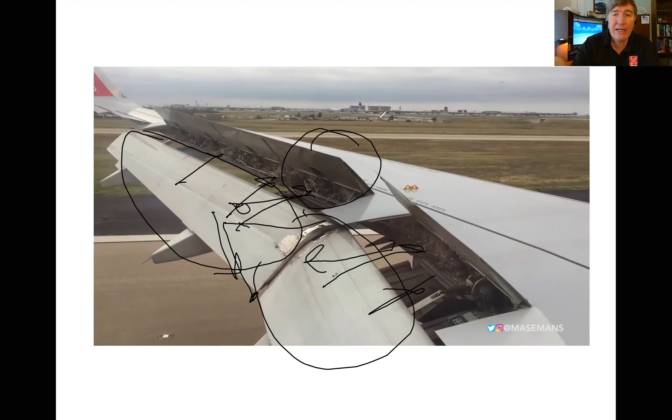But the reason I like this picture so much is because inside you can see, let me switch to a different color, the hoses and pipes. So inside here, there are pipes and hoses running all over the place. Those are hydraulic lines. Those are the things that make the flaps come up or go down. They're all based on hydraulics.

So what we are going to do for the next little while is learn about hydraulics and how they work. And there's also something called pneumatics, which is very similar to hydraulics. So if you've learned the one, you've basically also learned the other.

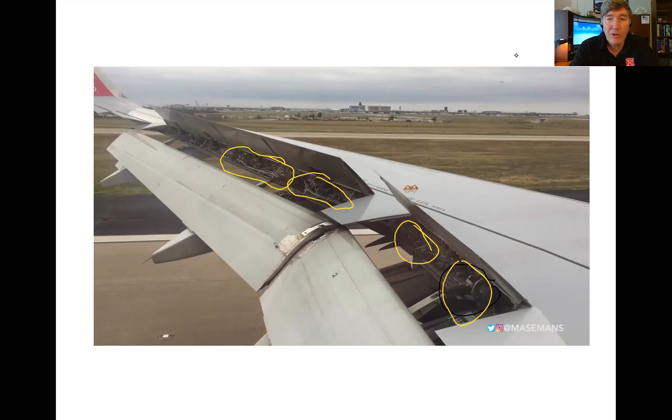So before I go on, let me just ask a question. I'm sure there's somebody here who can tell. What is the difference between hydraulics and pneumatics? How are they different? And also, how are they similar? I'm willing to bet there's somebody here that can answer that question. Come on, don't make me lose my bet. What are hydraulics? What are pneumatics? How are they similar? How are they different?

All right, so Marshall is saying that hydraulics use water and pneumatics use pressurized air. Okay, very good. So let me just modify the wording slightly: hydraulics use liquid. Now, water certainly could work, they could use water if they wanted to. But quite often they don't use water, and there's actually a very good reason why they don't.

Can anybody think of a reason why you would not want to use water in your hydraulic system? Would it evaporate if it gets too hot? Well, it's entirely enclosed, so that even if it did turn to water vapor, it couldn't escape anymore.

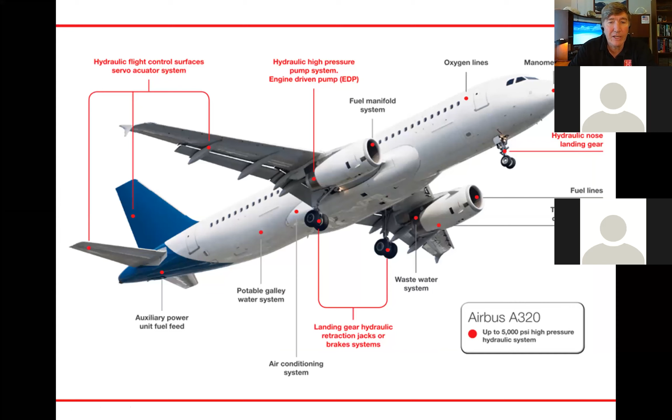All right, just more things on airplanes that use hydraulics. I got a lot of pictures, we could talk forever. You see how the hydraulic lines run through the airplane here. A lot of people are surprised when they realize how much the airplanes rely on hydraulics. Okay, so here is a great example of how hydraulics work. Let's say that you have a piston.

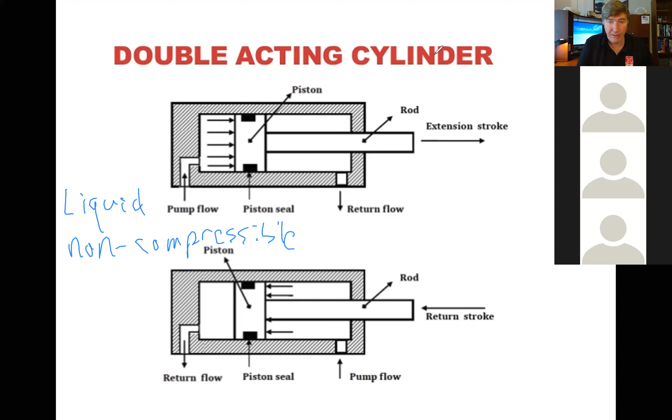If I have a balloon filled with air, if I can wrap my fingers totally around the balloon and I squeeze it, I can make that balloon smaller. It's going to want to sneak out between my fingers, so I'll have to make sure that doesn't happen. But I can take 1 gallon of air, and if I do it right, I can press it down and change that 1 gallon of air into a half a gallon of air. Now that half a gallon of air is going to have a lot higher pressure than the 1 gallon did, but I can compress it.

Whereas if I tried that with liquid, if I take a gallon of liquid and squeeze it, I can't change the volume. One gallon of liquid is going to be one gallon of liquid, no matter how much pressure I put on it—it does not change volume, whereas air does. That turns out to be very, very important when you're using pneumatics.

So let's suppose that I want to move the piston out. Whoops, sorry, I need to remember to turn on annotation before I touch my screen. Let's say I want to move the piston out, but only a little bit, maybe just 1 inch.

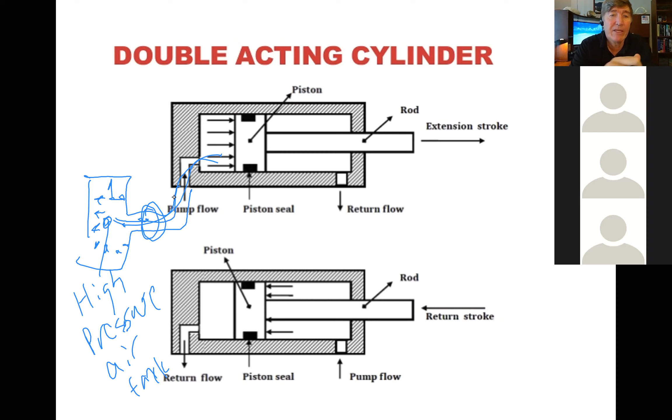Oops, I pushed the wrong thing there. So when you open up the valve, all of the air comes rushing in pretty much instantaneously, and this piston goes from being fully closed to fully open in no time flat. This piston comes shooting out with so much force that you could easily kill somebody using it if you're not careful.

Have any of you seen the movie No Country for Old Men? There's the bad guy in that movie—he kills people by walking around with a high pressure tank of either air or nitrogen and a piston like this, connected together. He holds the piston up next to somebody's head, opens up the valve, and that thing comes out like a bullet, and he kills people that way.

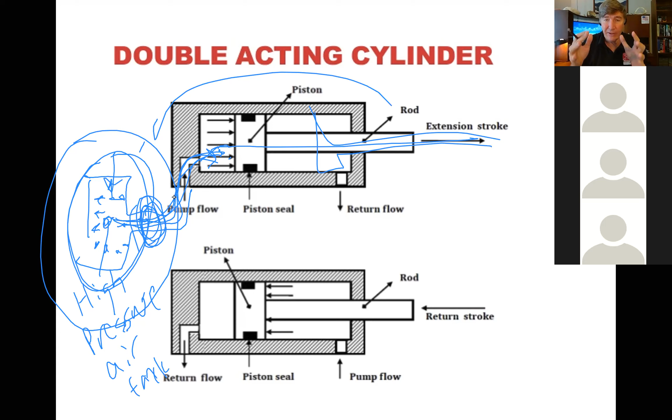If you tried to do that with hydraulics, you would not be able to, because as soon as you open the valve, the liquid comes flowing in, but as soon as a little bit of liquid comes out, you've lost all your pressure. Let's say you have a super high pressure tank with liquid under tremendous pressure. As soon as you open that valve and just a few drops come out, you've lost all your pressure. That's it.

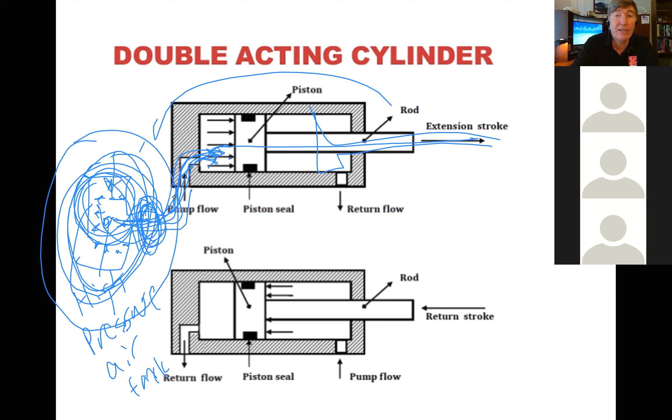So the piston will move a tiny little bit and then stop, because liquid is not compressible. So if you want to move the piston, you can't use a high pressure tank of liquid. What you have to do is have a pump, and continually pump the liquid in there, and it takes time to do that. So this piston is going to move much more slowly, very repeatably, but very slowly.

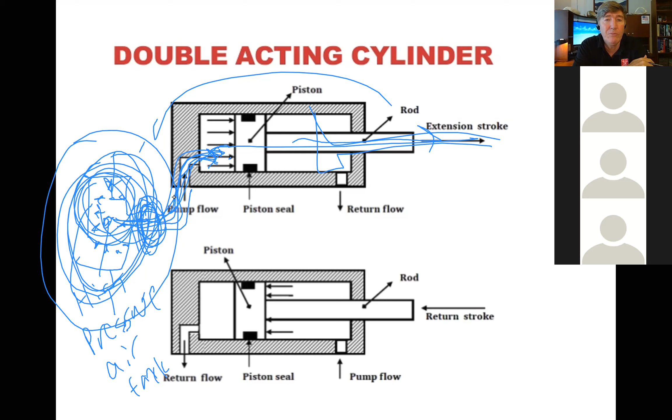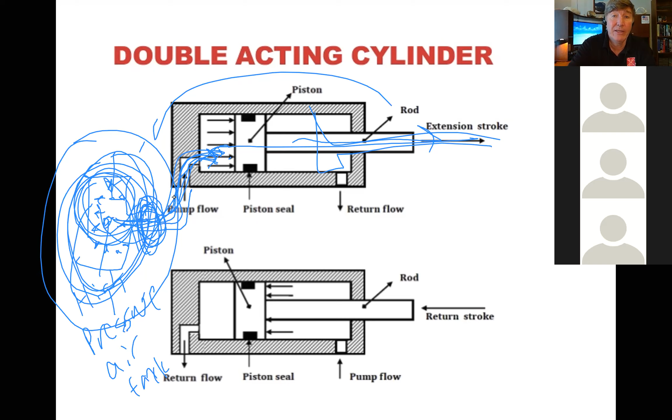Pneumatics are great when you want that piston to come slamming out fast. If you want that piston to be more controlled, pneumatics are a lousy way to do it. Then what you need is hydraulics. So on an airplane, they pretty much never need the thing to come slamming out. On an airplane, you need fine control. So on an airplane, they're going to use hydraulics.

We could, in theory, use hydraulics in this class too, but we don't, for a couple of reasons. One big reason is that it's more expensive to have all the pumps and things you need to pump the fluid. And probably the bigger reason is that if you get a little bit of a leak and hydraulic fluid comes out, it gets everywhere, and it's a mess to clean up. Whereas if you use pneumatics, if you get a little bit of a leak, no problem—you don't have to worry about cleaning it up.

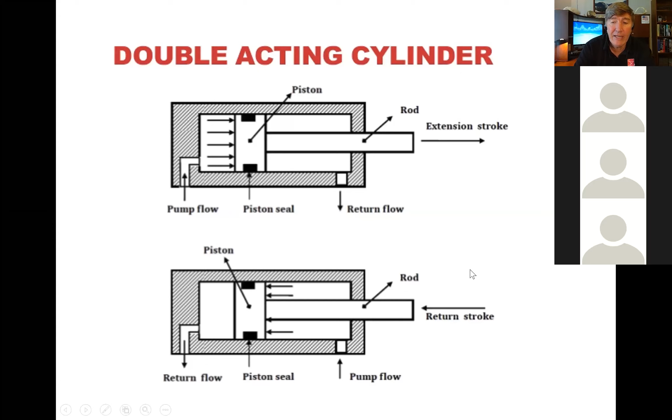So in this class, we make things using pistons and whatnot, like what you saw before. And the neat thing is that these pistons can work just as well whether you use them on hydraulics or on pneumatics.

Here is a picture of a piston, one that we use in our robotics club. The name here, Bimba, is just the company name—these can be made by a whole bunch of different companies. There's a fitting right here, and if we send in high pressure air, that makes this piston come out. Then if we want to retract it, we change the air—instead of going there, it comes in here, and that makes the piston come in. This is the kind of piston we use at Ames, and it works equally well whether it's powered by air or by a liquid. The piston doesn't care—it works just as well either way.

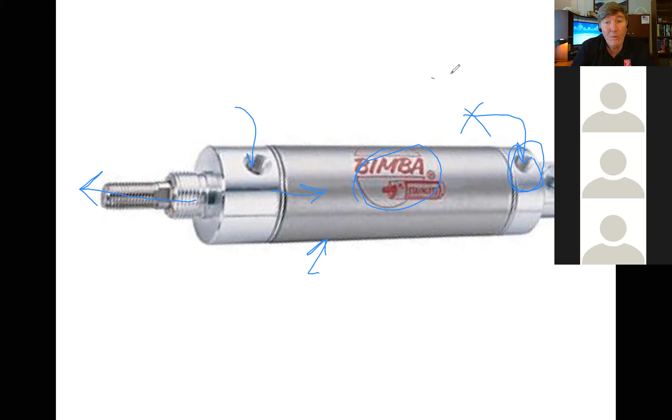So this is what we would be using if we were meeting in person at school. Right now we're running into a problem because we're meeting online.

We can design pneumatic systems, but I'm thinking most of you don't have the equipment at your home needed to actually build one. So for the next couple of class sessions, we're going to design a pneumatic system. We're going to do the drawings, figure out the theory, and make it so we know how to build it. But then we're going to have to stop there, because at your homes, you don't have all the equipment.

I'm hoping the coronavirus problem doesn't go on all school year long. I'm hoping that at some point we'll be back at Ames, and then we'll have our designs all ready to go. So then we can build a system, because I have all the components—I have lots of cylinders, lots of tubing, lots of valves, and lots of air compressors.

I have everything we need, but I have it at school, not at home.

All right, so what we're going to do is design a system. Let's talk about the system that we need to design, and let's start with a functional specification.

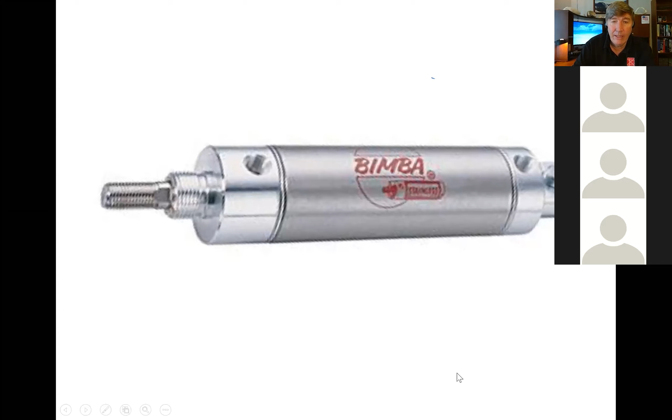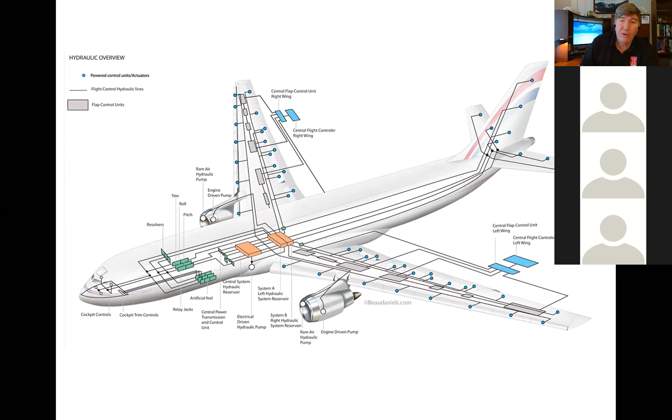All right, so here's the problem. We are designing an airplane here at Boeing, and actually, let me go back to this one. Okay.

Okay, so we're working on the tail of our airplane, and we've got this rudder here. It's a piece that we want to be able to turn to this side sometimes and turn to that side sometimes. It's a really big piece.

Now, when the airplane is flying, there's a lot of pressure there. So when this rudder comes out here, there's a whole lot of air pressure pushing on it. So we need something that can push this thing with a lot of force. But it has to be very, very controlled.

When the rudder comes out, we need to have superfine control. So if the pilot decides that he wants the rudder to only come out half an inch, then by golly, that rudder had better only come out half an inch. Or if he wants it to come out more, say 3 inches, then by golly, it better come out exactly 3 inches.

Now, it's not really essential that when the rudder comes out, it comes out instantly. If it takes a second or two to come out, we're okay with that. But it's extremely important that it comes out only the amount that we want it to come out.

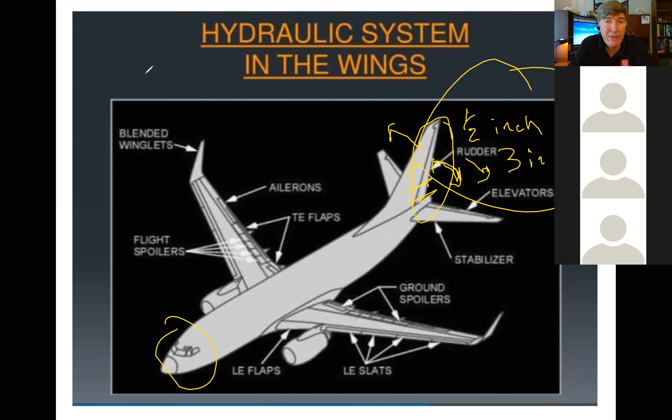And I need one of you. Hydraulics? I think hydraulics would be better since it'll be more precise, and since you don't really need instant movement. Yeah, okay good, I agree with you, and I see that those of you that typed in the chat box agree. Okay, so clearly what we want is hydraulics, not pneumatics.

All right, so what I want you to do is design a system. Now, we'll handle the actual rudder itself. You don't need to design the rudder. You just need to design the thing that moves the rudder. So let me switch to a whiteboard here.

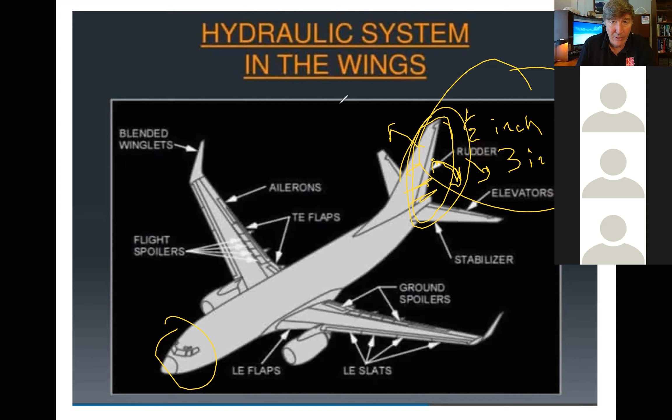Okay, so what we need from you is some sort of a mechanism that has a piston that connects to something, and we'll take it from here. So the rudder part here, okay, rudder, we'll do the rudder, so you don't need to worry about that. What we want you to do is design this, the piston here.

And we also want you to do the stuff that drives it. So somehow, and I'm going to leave this up to you, we need to have some sort of a mechanism that can push the fluid in here. Sometimes it's going to go in this side and other times it's going to go in this side, because remember, inside the mechanism here, we have this piston, okay?

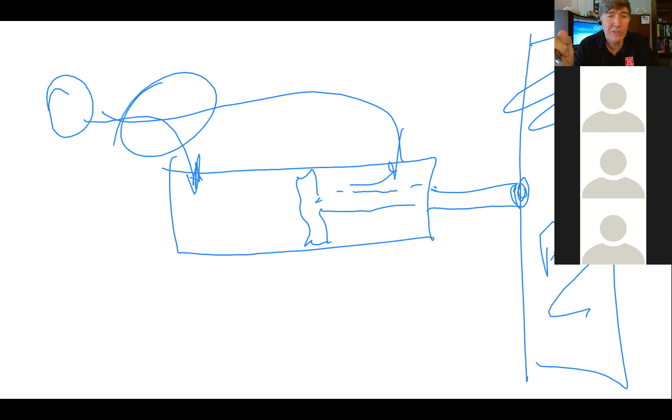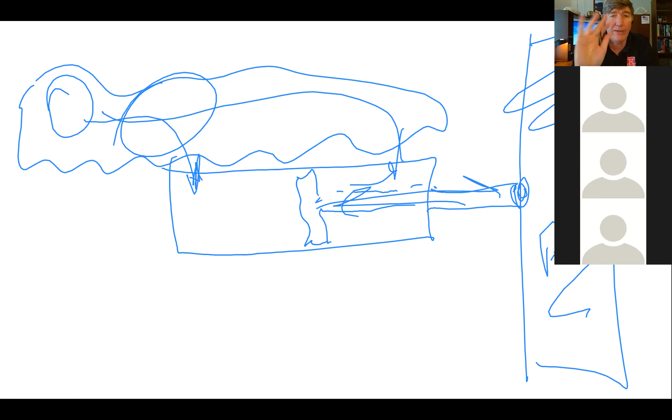So we need you to figure out the piping system so that when the pilot flips the switch one way, the piston goes out, and when the pilot flips the switch the other way, the piston goes in. This is your area of expertise, so I'm not going to suggest a way to do it, but we need you to come up with a solution for that. Okay, so do you have any questions?

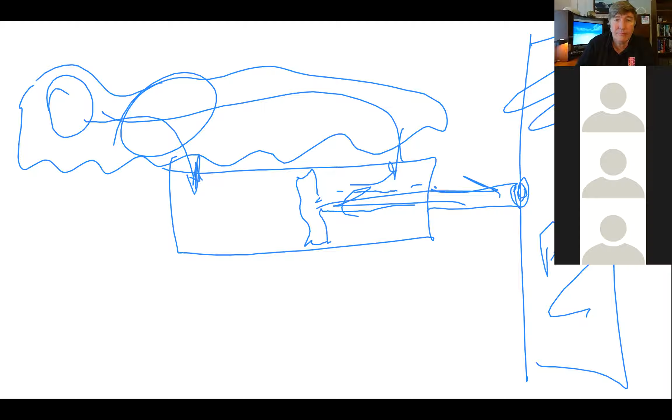So do you want the rudder to turn left to right, or do you want the rudder to come out like 3 inches, as you were saying, 2 inches?

Okay, I'm glad you asked that question. That's something we will worry about, okay? We are designing the rudder, we're not asking you to design the rudder. We're just asking you to design the thing that pushes the rudder. So whether it pushes to the right or to the left, or whether it pushes up or down, that's not for you guys to worry about. We'll take care of that. You just need to design something that pushes the piston out when we want it to go out and brings the piston back when we want it to bring back.

Any other questions? Go ahead. Do we need to worry about how big our design is, so that it fits?

Yes, you definitely need to worry about how big it is. I'm glad you mentioned that, I forgot to talk about it. Let's talk about the force that's required. When the airplane is flying and this rudder gets pushed one way or the other, that can take a tremendous amount of force. We've calculated that the amount of force needed by your device could be as much as 1,500 pounds. So whatever device you come up with needs to be able to push with as much as 1,500 pounds of force. And when it retracts, it might also need 1,500 pounds of force.

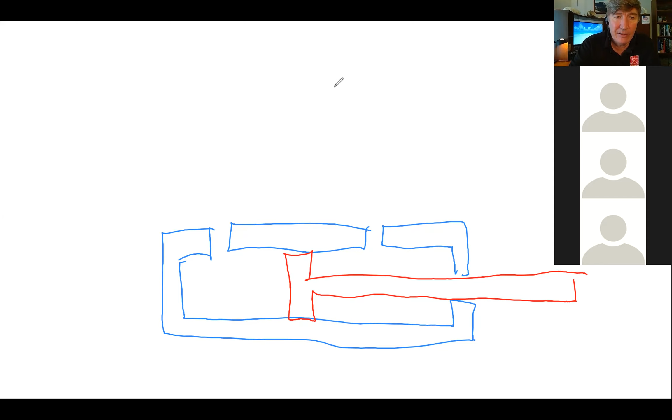All right, we'll switch to a different color. We haven't used green yet. So hopefully you guys understand that when you push the liquid in here, you're going to have a whole bunch of pressure, and it's going to push the cylinder out. But other times you want the piston to come back in. So then we need to get rid of the pressure here, and instead send in the liquid through here.

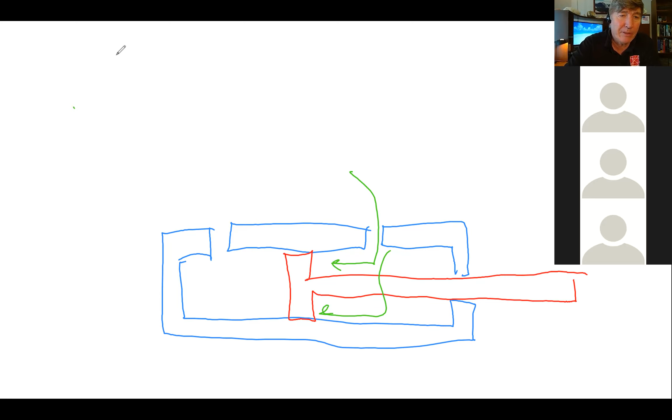Here is the thing that is going to be the trickiest part of the job for you. You are going to have to figure out a way to have a pump. So this is going to be an oil pump.

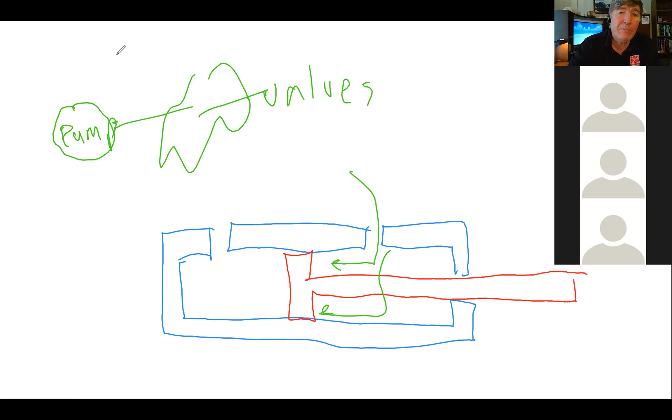And you need to figure out how, depending on how we go with various valves, we're going to have a whole bunch of valves and things in here. We're going to make it so that sometimes it makes the fluid come in this way, and other times it makes the fluid come in this way. So you have to design how you're going to do the piping and how you're going to work the valves in order to make this happen.

This right here, this is the tricky part. The cylinder, you don't have to design a cylinder. You can buy cylinders off the shelf.

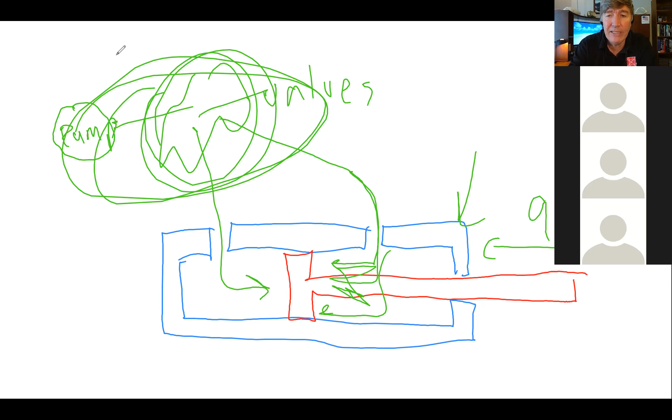So now, you do have to get the right size cylinder, because remember, Moses was asking how much does it come out? It has to be at least 9 inches of travel. That's really important. And then the other thing you needed to know is that the total force here must be at least

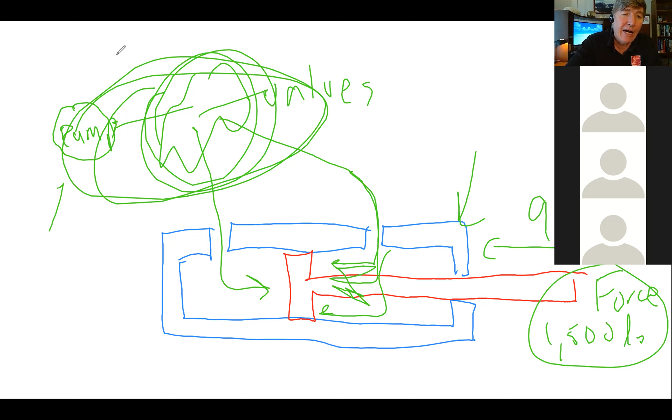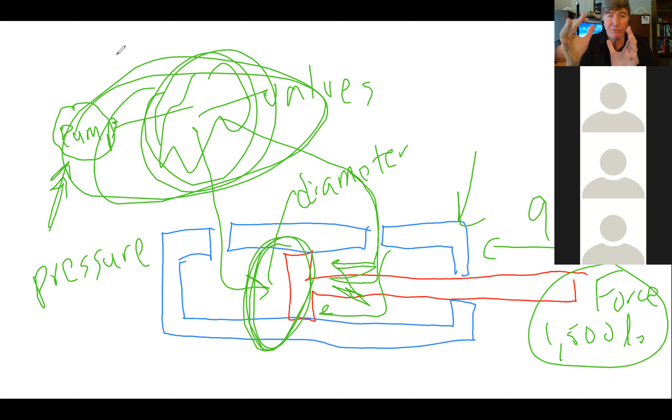1,500 pounds. So you're going to have to do a little bit of math here in order to figure out how much pressure this pump has to be able to provide. And together with that, you're also going to have to figure out what is the diameter of this piston, because if you use a really, really big piston, then you don't need such high pressure. Just a moderate pressure can give you a large force if you have a really big diameter piston.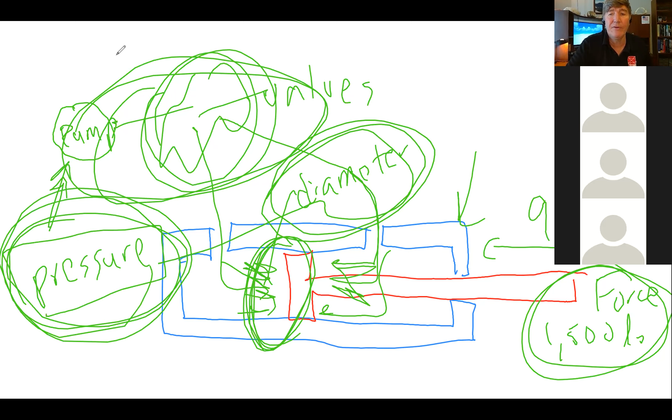But a really big diameter piston may not be desirable for lots of reasons. Maybe it would be better to go with a smaller diameter piston. And if that's the case, then you're going to need a pump that can put out a higher amount of pressure. So you need to figure out what's the relationship between pressure and diameter of the piston to give you the amount of force that you need. I don't want to give that away. That's one of the things you're going to have to do some research on.

So you can see you've got a bunch of things that you need to think about here. But that's part of the engineering specification, which is not tonight's homework. Tonight's homework is only the functional specification. So although you are going to have to think about this at some point in the near future, not tonight. You don't have to worry about it tonight. Your job tonight is just to make a functional specification describing the problem.

So do you guys think that you know enough that you could now write up a functional specification? Give me a yes or a no in the chat box, or thumbs up or whatever. Yes means you think you now have enough information that you can write up a functional specification. No means that you don't.

Okay, good. Now, one other thing, hang on just a sec while I grab something.

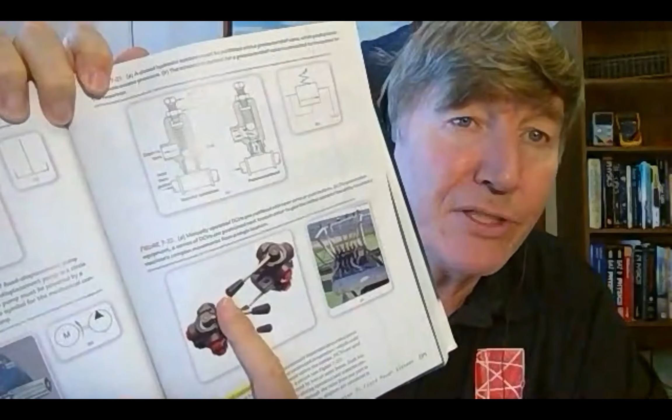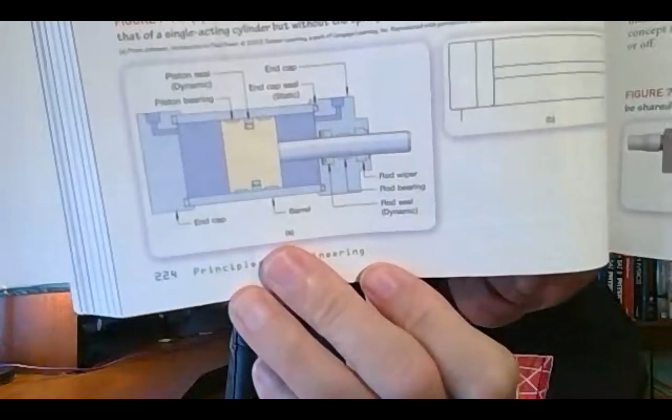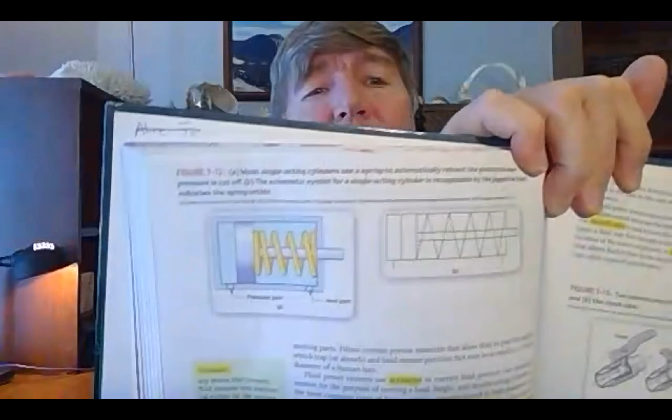What you're going to see is that they talk all about fluid power and how it works. They talk about different valves you might want to use to make hydraulic systems go various ways. They talk about pistons, with a really good picture showing how a piston works, and about dual action pistons, which is the kind we want. They also mention single action pistons, which I'm not going to take time to talk about, and different types of fittings you might want to use.

So this chapter, chapter 7, is an excellent resource. I'm not going to require that you read the whole chapter, but I want you to look through it and make notes about the things you find there. You'll also find information that will help you calculate how much force a piston can produce depending on the pressure.

There's some mathematics involved here, and they do a good job describing it in the book with formulas. If you know the pressure and you know the area of the piston, you can calculate how much force that piston is going to have when it goes out and when it comes in. I don't want to spoil it by reading the book for you—you guys are big girls and boys, you can do the reading on your own.

So you only have one deliverable. Next time we meet, which will be Monday, I need you to turn in a functional specification, but I'd also like you to have started reading chapter 7. You don't have to read the whole thing, just skim through and find the important stuff related to what we need, and start coming up with some ideas.